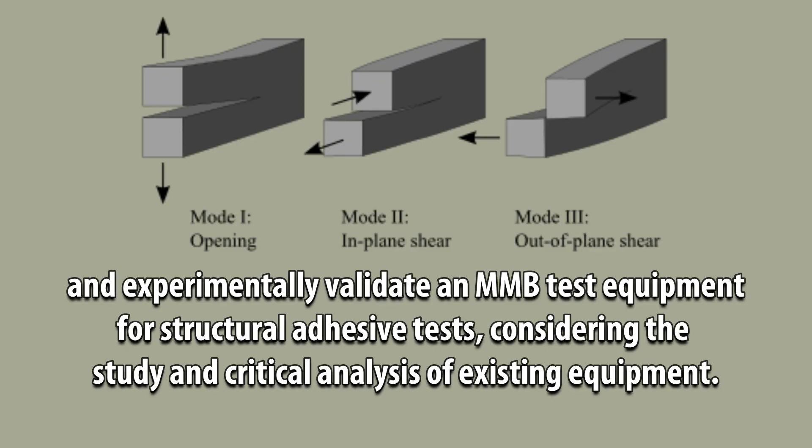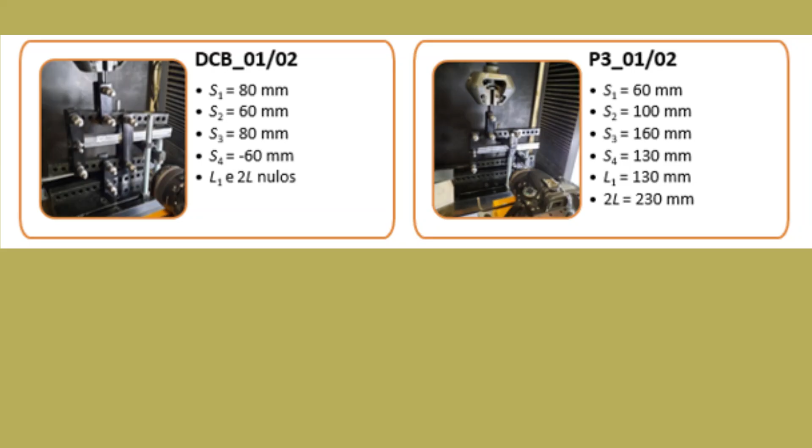The numerical work consists of creating the geometries of the different components of the equipment in software and carrying out the respective simulations for structural validation. Experimentally, the intention is to manufacture the designed equipment and carry out the respective tests.

In real applications, adhesive joints are subjected to mixed-mode I+II loading. The tests developed for mixed-mode loading are complex but considered highly relevant for fracture characterization. There are several mixed-mode tests, of which the mixed-mode bending (MMB) test stands out for its capacity to allow the variation of the mixed-mode ratio practically without limitations.

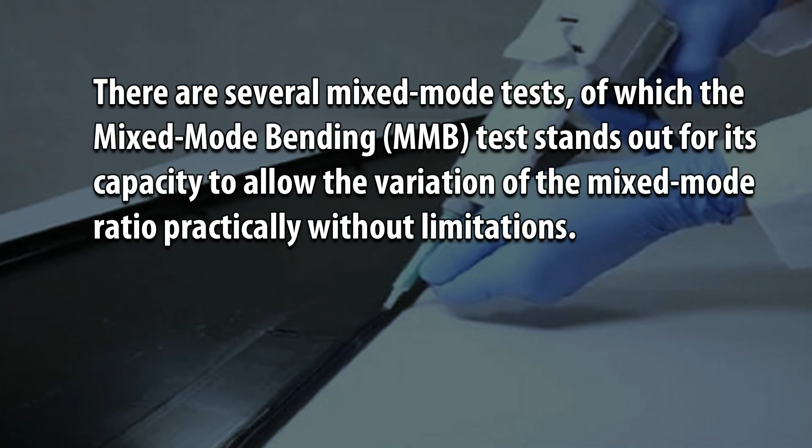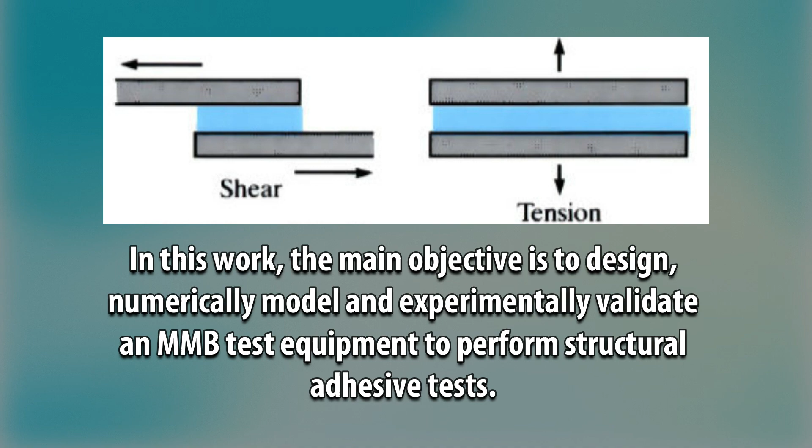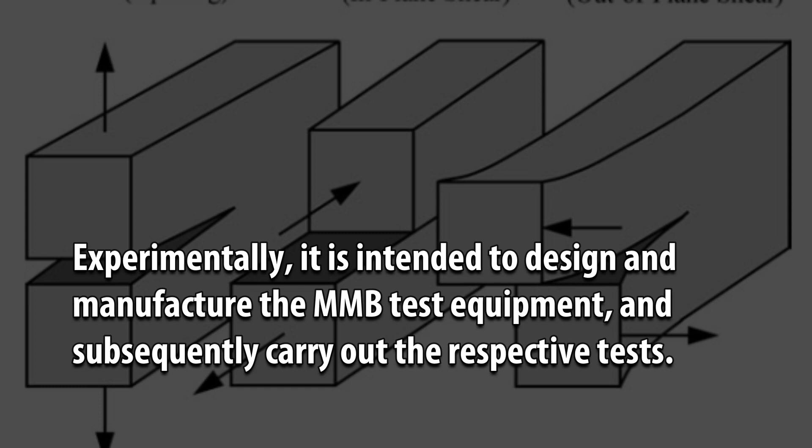In this work, the main objective is to design, numerically model and experimentally validate an MMB test equipment to perform structural adhesive tests. Experimentally, it is intended to design and manufacture the MMB test equipment and subsequently carry out the respective tests. The end result should be equipment that enables obtaining various mixed-mode combinations, using a single equipment and the same type of test specimen for further application in the design of adhesively bonded joints.

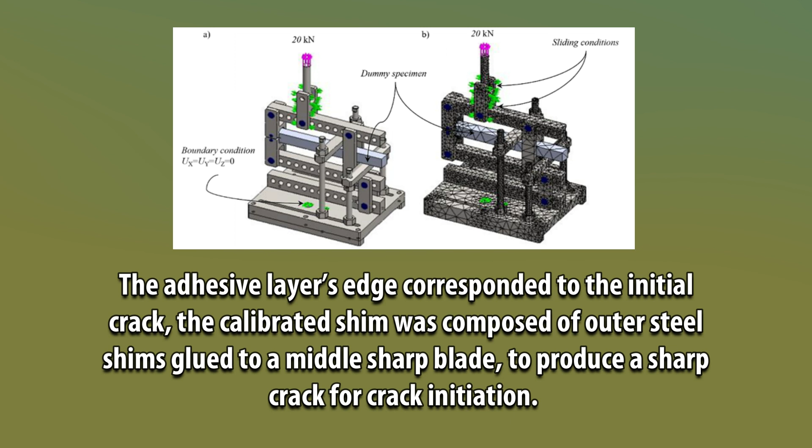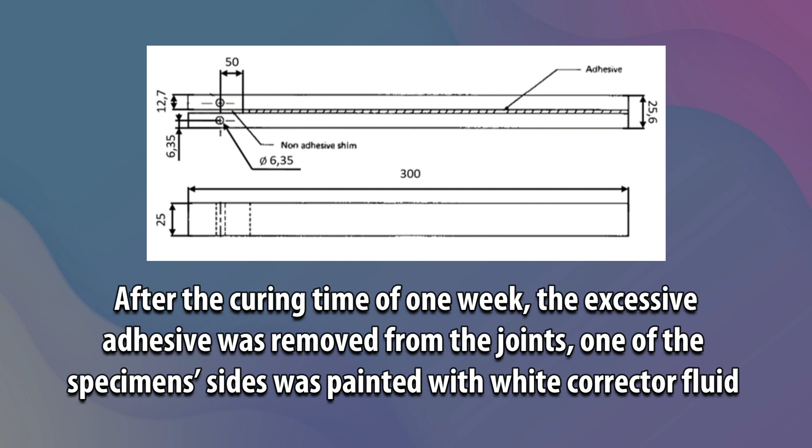The adhesive layer's edge corresponded to the initial crack. The calibrated shim was composed of outer steel shims glued to a middle sharp blade to produce a sharp crack for crack initiation. After the curing time of 1 week, the excessive adhesive was removed from the joints. One of the specimen's sides was painted with white corrector fluid, and a printed scale was glued at the same face to facilitate reading of crack length during the test.

The equipment was validated by fabricating and testing adhesive joints, although further validation should contemplate estimating the mixed-mode behavior of adhesive joints and comparing with literature data.